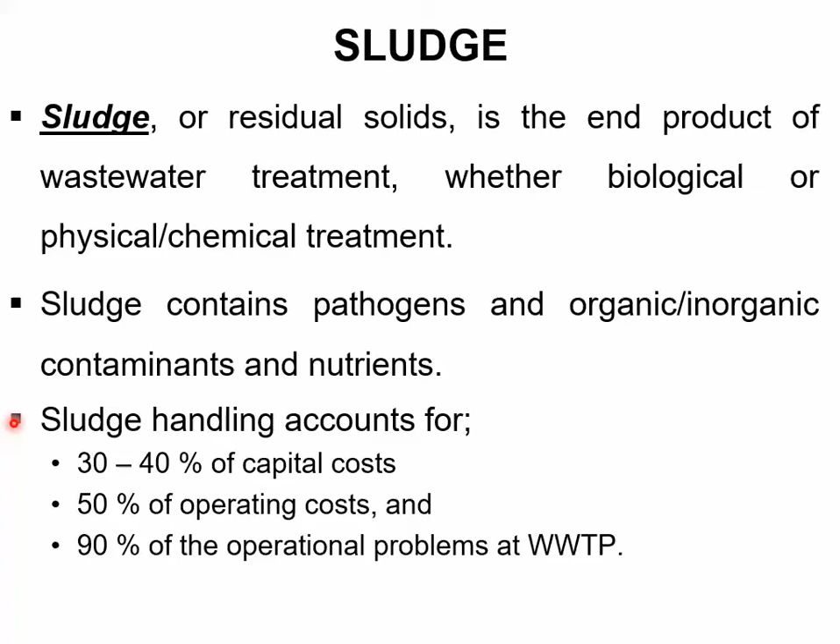Another very interesting fact about sludge handling is that it accounts for at least 30 to 40% of the capital costs of treatment plants, 50% of the operating costs, and around 90% of the operating problems are related to sludge handling and sludge treatment.

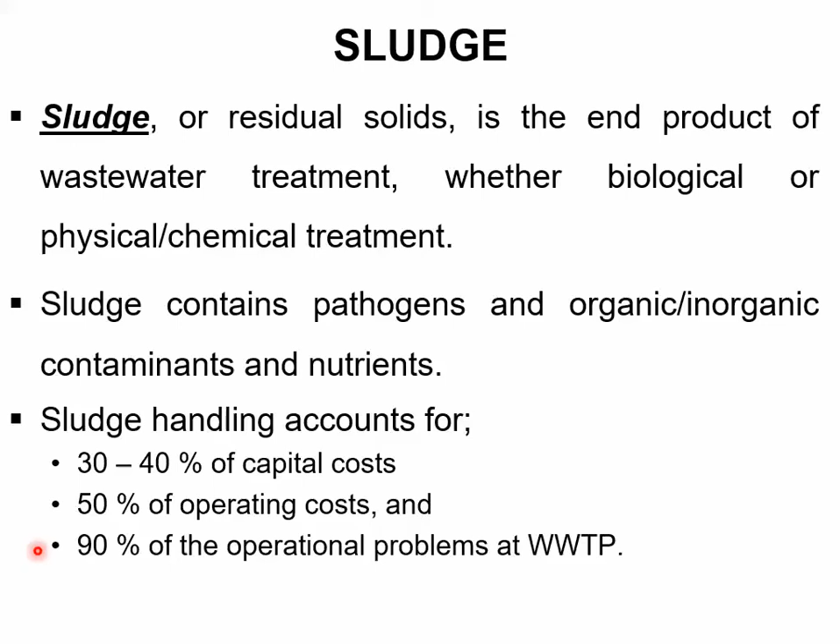So the key objectives of sludge treatment include, firstly, the reduction of the moisture content of the sludge, thereby reducing the sludge volume. So the principal objective is basically reducing the volume of the sludge, achieved by reducing its moisture content. A reduction in moisture content of around 1-2% can lead to significant reduction in sludge volume.

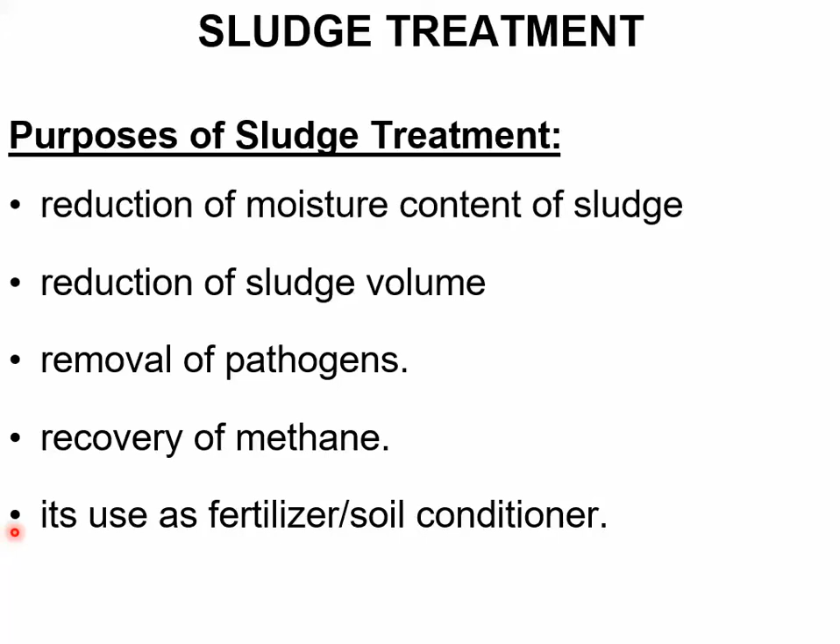Removal of pathogens is another objective. Recovery of methane: in case of anaerobic sludge treatment, methane can be generated and recovered as a renewable energy source. And the final objective is, if we want to use the treated sludge as fertilizer or soil conditioner, we obviously have to treat it first, then it may be used as fertilizer.

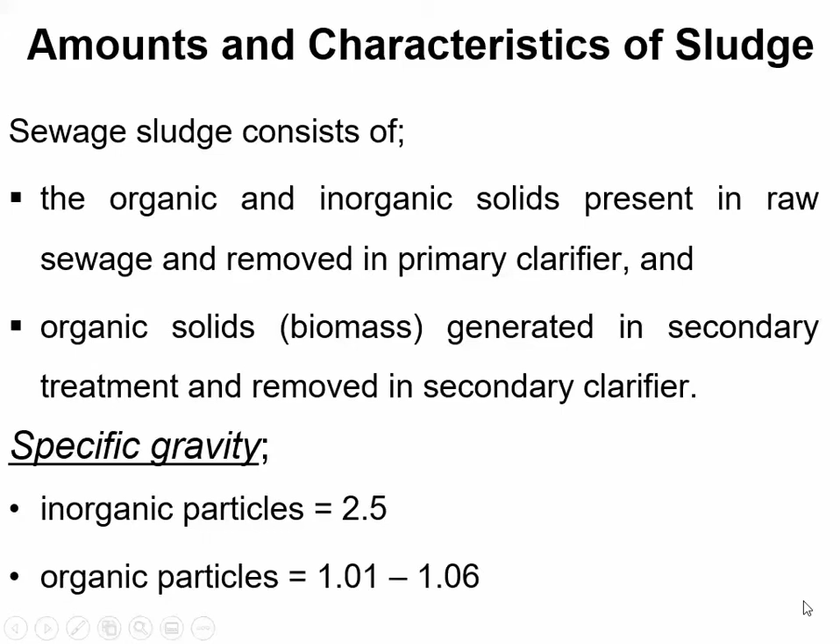Sewage sludge generally consists of the organic and inorganic solids present in raw wastewater and removed in the primary clarifier, plus the organic solids or biomass generated in secondary treatment and removed in the secondary clarifier. The inorganic fraction of the sludge may be assumed to have a specific gravity of about 2.5, while the organic matter has a specific gravity of 1.01 to 1.06, depending upon its source and characteristics.

Domestic wastewater typically contains 100 to 350 milligrams per liter of suspended solids, depending upon the flow. Communities which contain major industries may vary from this value. These typical values are for domestic wastewater only.

Out of this quantity or concentration of solids in raw wastewater, approximately 60% may be expected to be removed in primary clarification. The remaining portion of suspended solids goes to secondary treatment, where it is either oxidized in biological treatment or converted into biological mass.

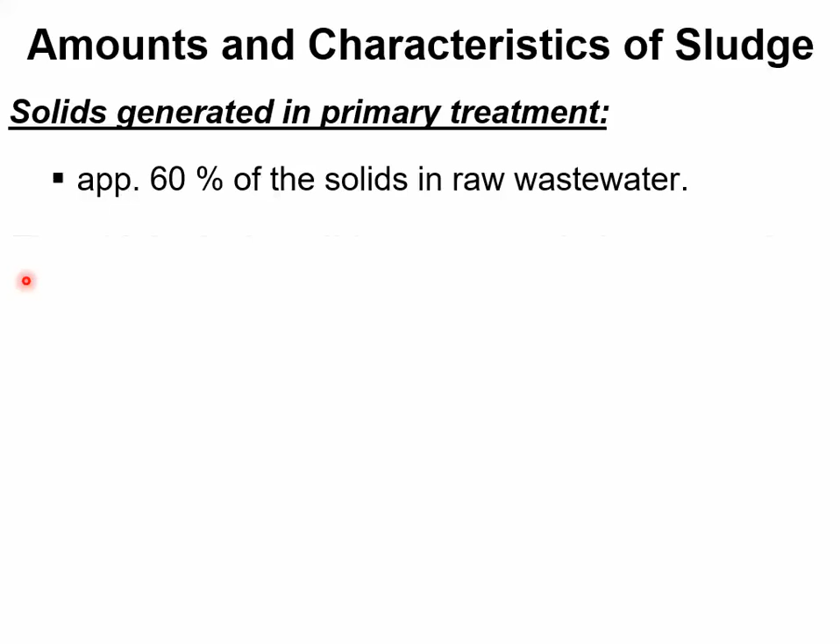The biological solids generated in secondary treatment may be 0.4 to 0.5 kilograms per kilogram of BOD applied in attached growth processes like trickling filter, whereas 0.2 to 1 kilogram per kilogram of BOD applied in suspended growth processes. These are the typical quantities of solids in the form of biomass expected to be generated in secondary treatment. What happens in secondary treatment? The bacteria oxidize the dissolved portion of organic matter and convert it into stable end products, oxidized products like carbon dioxide, and a major portion goes to the biomass itself. So that biomass growth or production is in this range for attached growth processes and in this range for suspended growth processes like aerated lagoons and activated sludge processes.

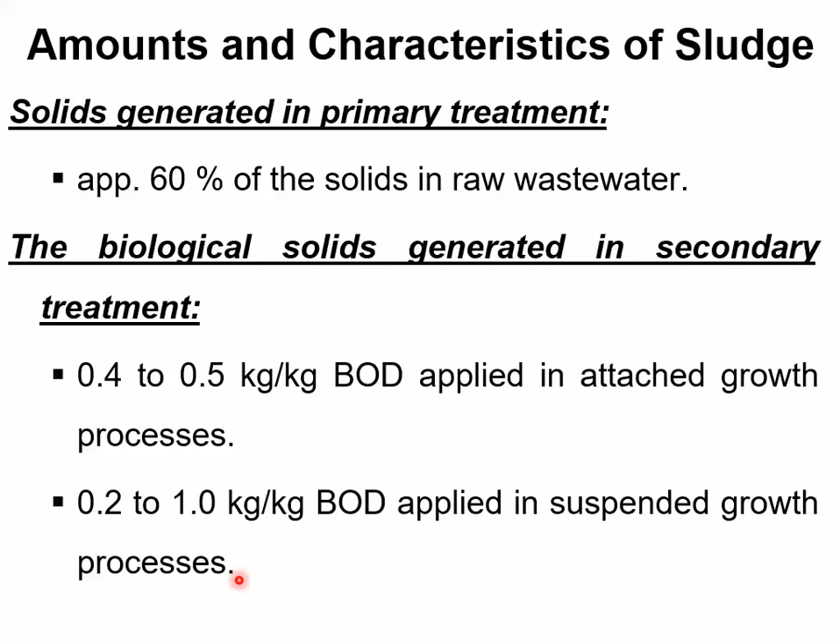So let's solve an example problem to illustrate how to calculate the amount of solids or sludge produced from a primary or secondary clarifier. The problem states that you have to estimate the solids production, meaning dry solids, from a trickling filter plant treating a flow of 1000 cubic meters per day with BOD of 210 milligrams per liter and suspended solids concentration of 260 milligrams per liter.

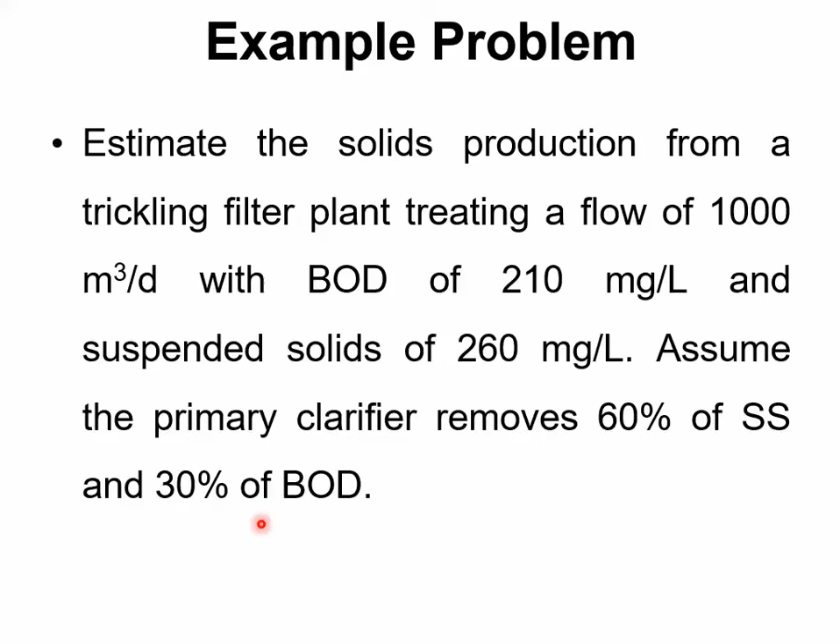Assume the primary clarifier removes 60% of suspended solids—this is a typical removal for a primary clarifier—and it also removes 30% of the BOD, which obviously would be in the form of suspended organic matter. So in this 60% removal of suspended solids, this BOD removal is also included. However, BOD removal is required to estimate what percentage of organic matter went to the secondary clarifier and what was the amount of solids produced in secondary treatment and removed in the secondary clarifier. So let's solve this problem.

For the solution, first we have to estimate what the primary clarifier will produce as solids. As discussed earlier and given in the problem statement, 60% of the suspended solids will be removed in the primary clarifier. So the total amount of solids produced can be estimated by multiplying 0.6 with the suspended solid concentration of wastewater, which is 260 milligrams per liter, and the total discharge or flow, which is 1000 cubic meters per day. This is a typical mass loading calculation, similar to what we've done for BOD: discharge multiplied by concentration multiplied by the fraction removed in the primary clarifier. So the answer is 156 kilograms per day.

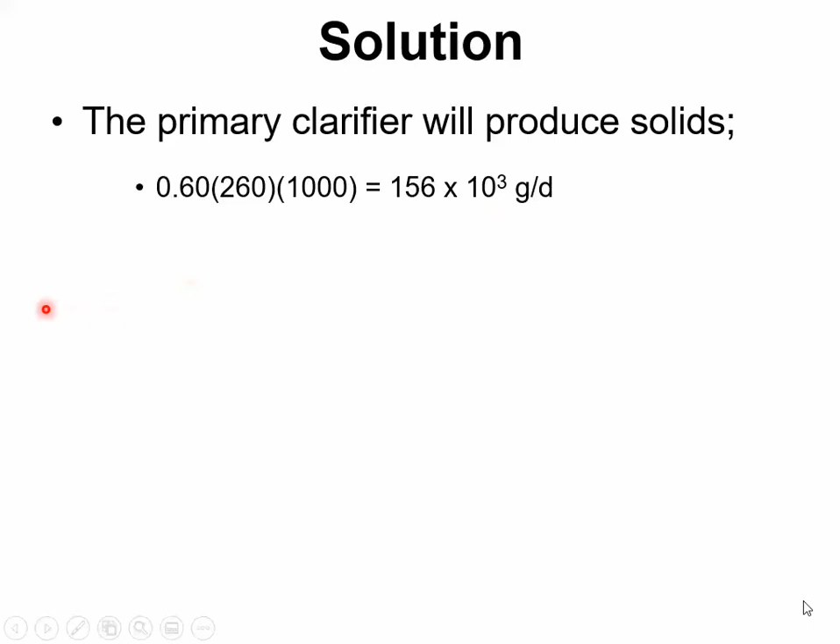Now the secondary clarifier will remove suspended solids in the form of biomass, produced in secondary treatment processes based on suspended and attached growth. The production amount varies but is linked to the BOD load applied to secondary treatment. Approximately 0.5 kilograms of biomass or solids will be produced per kilogram of BOD load into secondary treatment. Therefore, first we need to estimate the BOD load going into the secondary treatment units.

So secondary treatment will receive a BOD load of 0.7, meaning 70% of the original BOD concentration, since 30% is removed in the primary clarifier. So 70% goes to secondary treatment. 0.7 of 210 multiplied by the discharge gives a value of 147 kilograms of BOD per day.

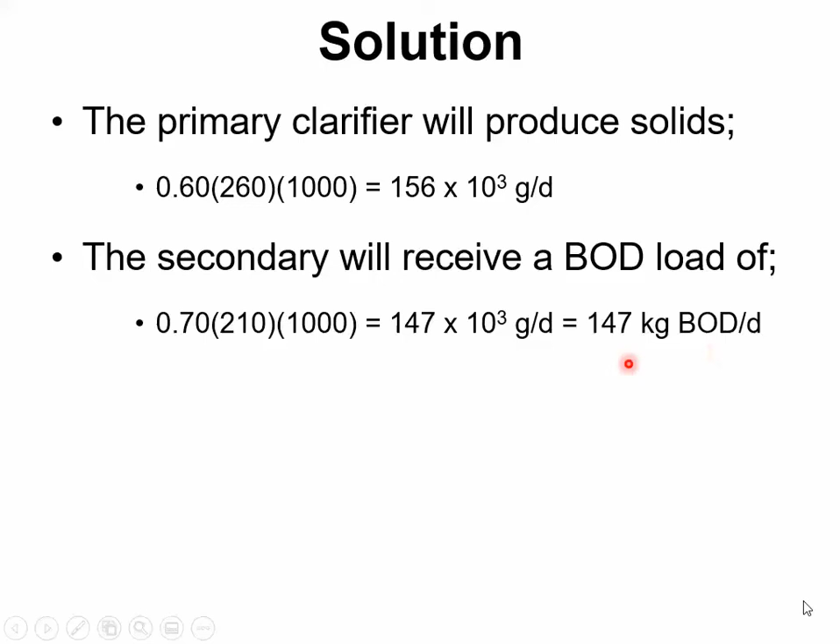Taking a typical value for attached growth processes from the range given earlier, 0.5 kilograms per kilogram of BOD is used here. This gives the amount of solids produced as a result of BOD consumption, and these solids are the biomass. So 0.5 multiplied by 147 gives 74 kilograms of suspended solids produced from the secondary treatment, which will be removed in the secondary clarifier.

So the total mass of dry solids generated from primary and secondary clarifiers will be 156 kilograms from the primary clarifier plus 74 kilograms from the secondary clarifier, giving a total of 230 kilograms per day of dry solids. This dry solid would have a moisture content of, let's say, 95-96% or 98%. Depending on the moisture content, you can estimate the total mass of the sludge as well as the volume of the sludge using the specific gravity.

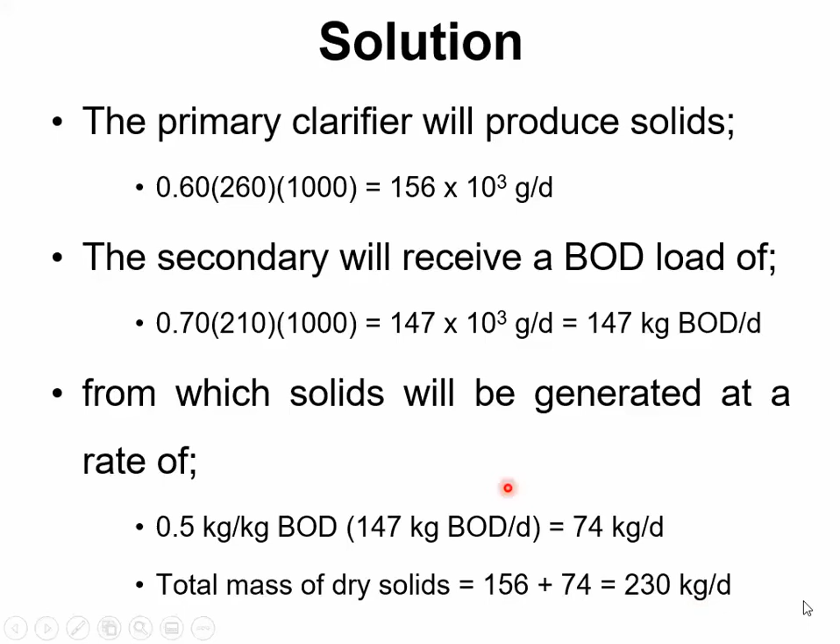Typical solid contents in primary sludge are in the range of 4 to 6%, with moisture content of 94 to 96%. Waste activated sludge contains a lot of moisture, 98.5 to 99.5%, whereas trickling filter sludge is comparable to primary sludge, containing 95 to 96% moisture and 4 to 5% solids. In raw domestic wastewater, around 0.1% are solids and 99.9% is moisture or water.

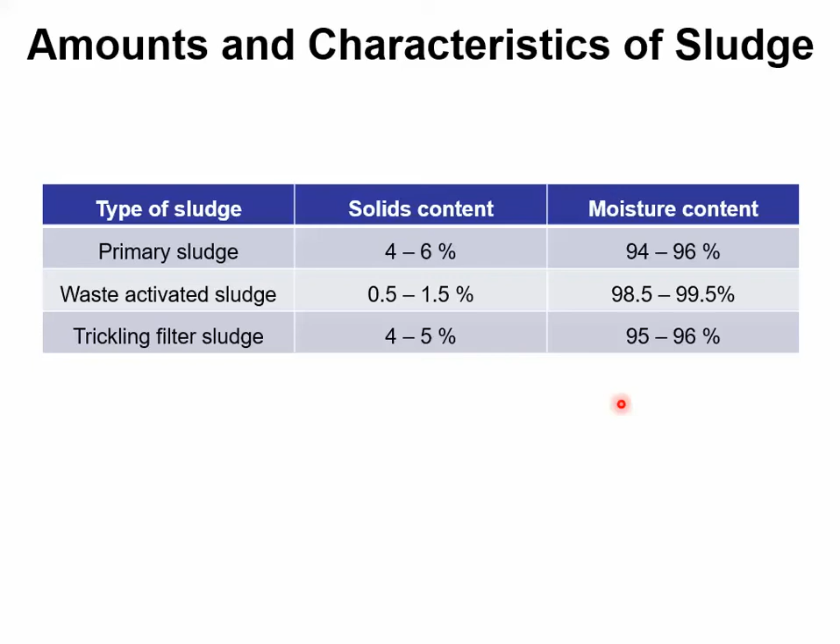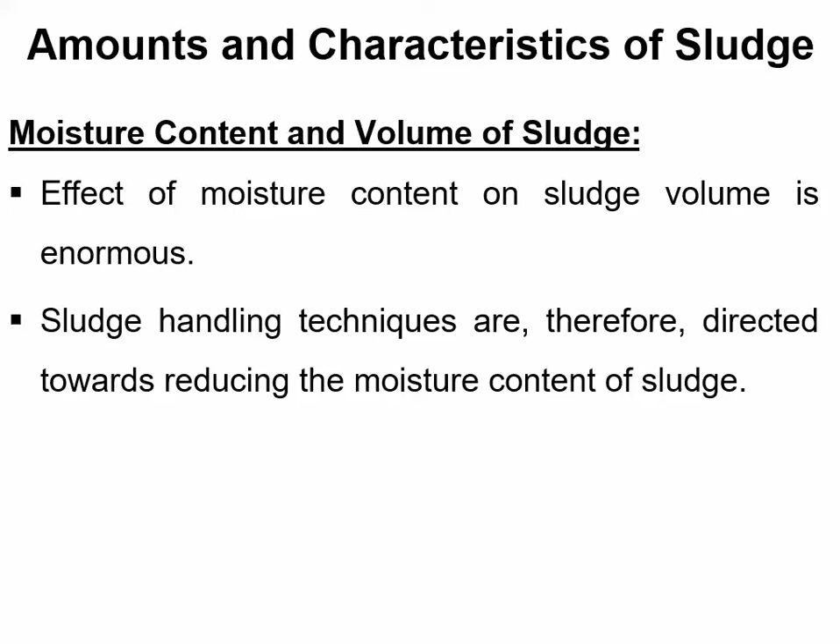In the primary and trickling filter sludge, the moisture content is slightly reduced and solid content enhanced, whereas in waste activated sludge, moisture content remains very high, very close to raw wastewater. Due to this enormous moisture content present in the sludge, the volumes of sludge are very high. Therefore, sludge treatment processes mostly target moisture content reduction. The effect of moisture content on sludge volume is enormous, and sludge handling techniques are directed towards reducing moisture content and thereby reducing the volume of sludge.

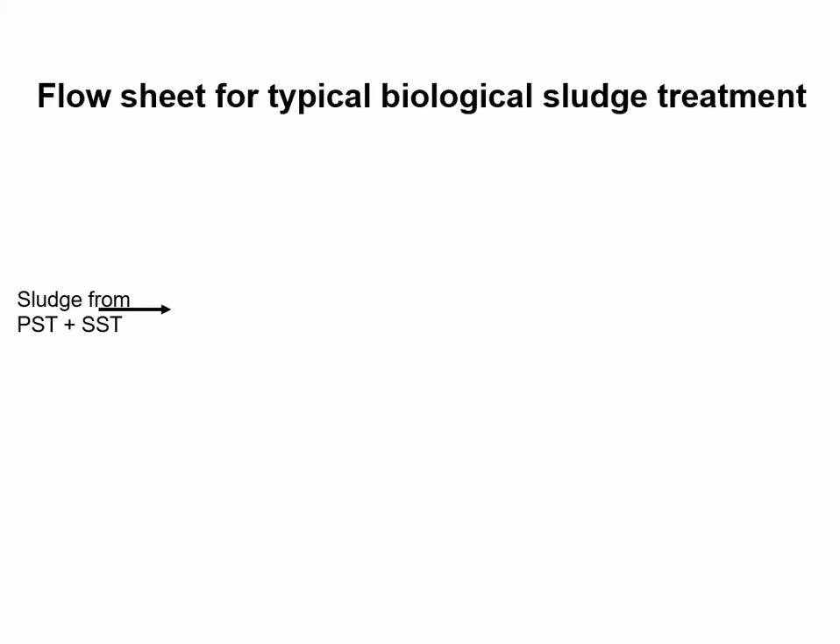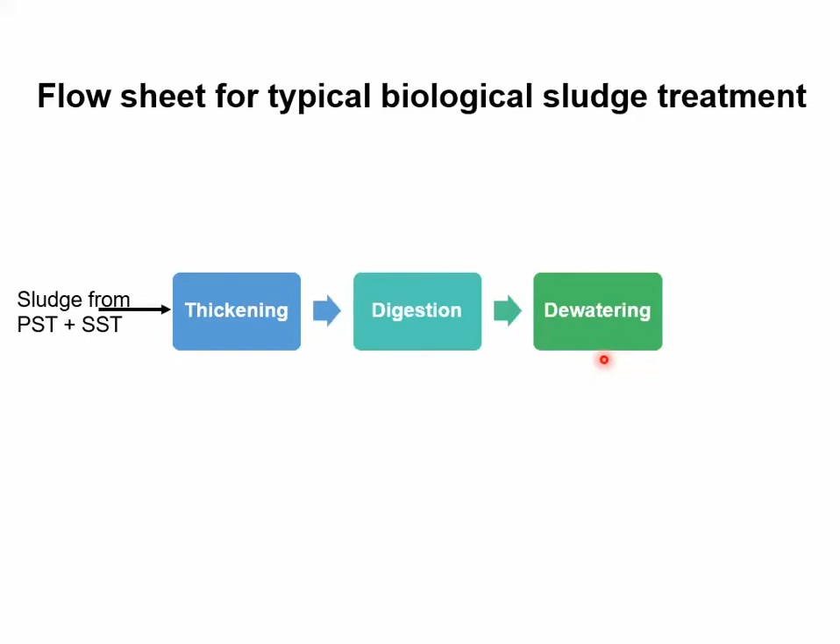As mentioned, most sludge handling techniques are directed towards reducing moisture content and ultimately reducing sludge volume. A typical flow sheet for biological sludge treatment includes the first unit of sludge thickening, which aims to reduce moisture content by gravity settling. Then comes sludge digestion, which can be aerobic or anaerobic, similar to digestion of organic matter in secondary treatment, except here the organic matter is sludge. The third unit is dewatering, again to reduce moisture content. After dewatering, dry solids are left, which are disposed of. The supernatant from the digestion unit and the underflow from the dewatering unit—the water separated from the sludge in both units—goes to the primary sedimentation tank, redirected back to the start of the wastewater treatment plant.

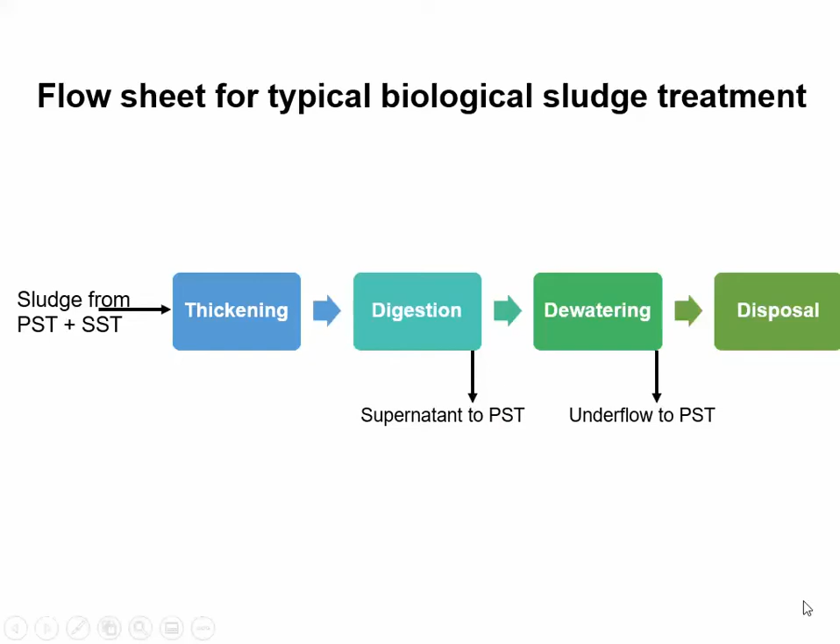Here is another example problem to illustrate how percentage moisture content affects sludge volume. The wastewater treatment plant produces 1000 kg of dry solids per day at a moisture content of 95%. The solids are 70% volatile, meaning organic, with specific gravity of 1.05, and 30% are non-volatile, meaning inorganic, with specific gravity of 2.5.

We have to determine the sludge volume as produced and after an anaerobic digestion process, which reduces two things. First, it reduces the volatile solids by digestion and oxidation by 50% of the original amount, and it produces a sludge with moisture content reduced from 95% to 90%. So you have to estimate the sludge volume as produced and after the digestion process.

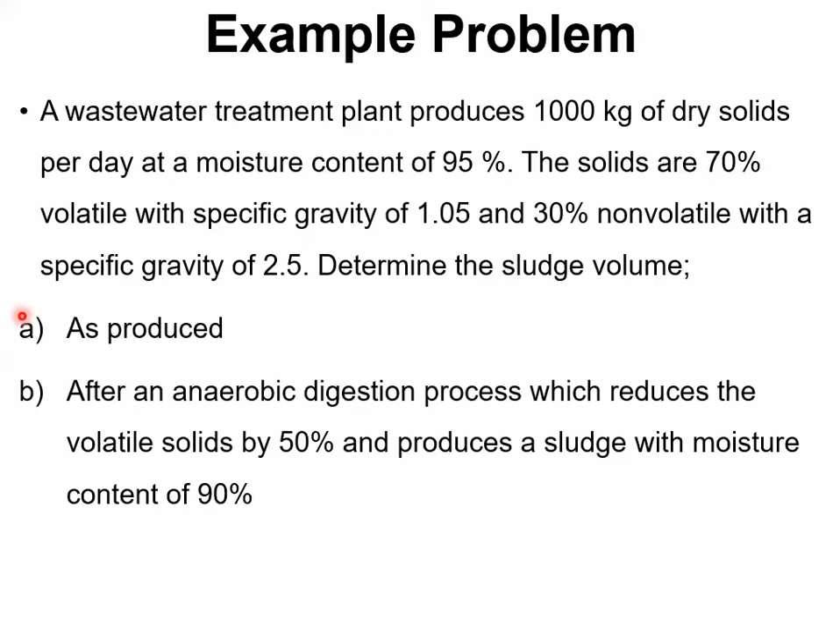So let's first deal with part A. We should determine the volume of the sludge as produced. The original mass of the sludge would be mass of dry solids divided by fraction of solids. Since the moisture content is 95%, the fraction of solids would be 0.05. Dividing, we get 20,000 kilograms per day. This is the mass of sludge.

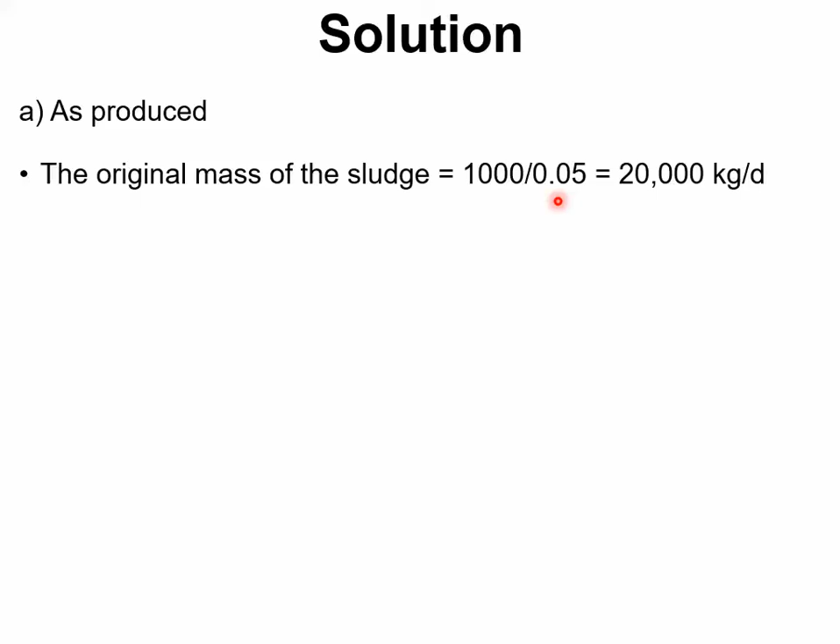Originally, mass of dry solids was provided as 1000 kilograms. We divided it with fraction of solids, so we get the mass of total sludge, which is 20,000 kilograms per day. As stated, 1000 kilogram is dry solid weight, of which 70% is volatile and 30% is non-volatile. Hence the sludge contains volatile solids, non-volatile solids, and water as moisture. So let's determine the volume of volatile solids, then non-volatile solids, then water, and later sum these up to calculate total volume of sludge.

For volatile solids, the mass is 70% of the total 1000 dry solids, so it is 700 kilograms. To get the volume, we divide it with the specific gravity: 700 divided by 1.05 gives 667 liters. Non-volatile solids are 300 kilograms, being 30% of the 1000. So 300 kilogram divided by their respective specific gravity of 2.5 gives a volume of 120 liters.

Now what is the water? If 20,000 is the total mass of sludge and 1000 is the dry solids, the mass of water would be 19,000 kilograms. And volume of water would be the same, taking specific gravity as 1. So the total volume of the sludge would be 19,787 liters.

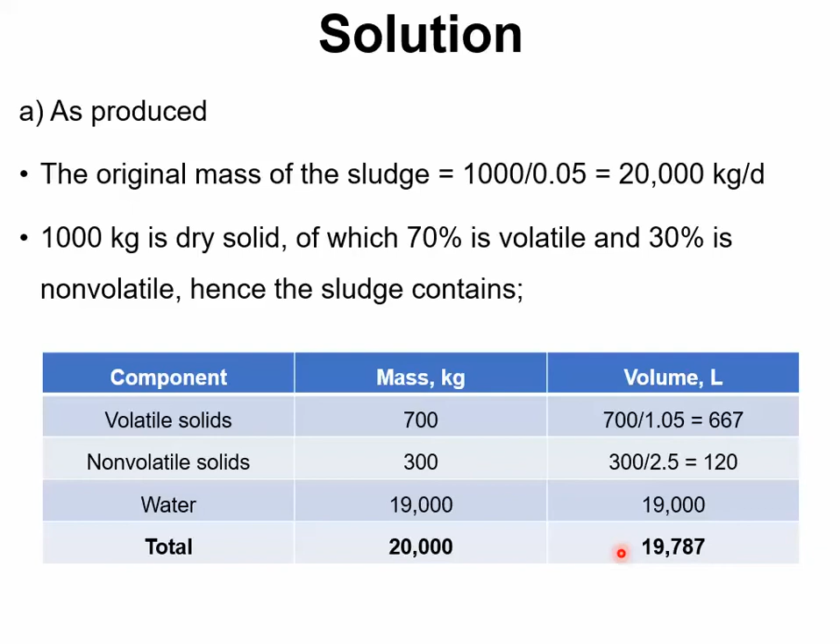Now after digestion, which is part 2 of the problem, it was stated that volatile solids are reduced to 50% of the original. So originally they were 700 kilograms, and after 50% reduction they are left as 350 kilograms. Moisture content has been reduced to 90%. Therefore, the dry mass will be reduced to 650 kilograms because non-volatile solids, which were 300, remain the same, whereas volatile solids, which were 700, have now been reduced to 350. So 350 plus 300, the total dry mass would be 650 kilograms.

And the sludge mass, using this moisture content and the solids fraction of 0.1, dry mass of solids divided by fraction of solids gives us the total mass of the sludge as 6500 kilograms. So now you can estimate how much reduction in mass has been achieved as a result of the digestion process. Originally it was 20,000 kilograms, now it is 6500 kilograms.

The digested sludge would contain these elements: volatile solids, originally 700, after digestion reduced to 350, so its volume would be 333 liters. Non-volatile solids are unchanged because they are not affected by digestion. And the water, now subtracting 650 kg from 6500 gives the value of 5850 kilograms, and the volume would be the same.

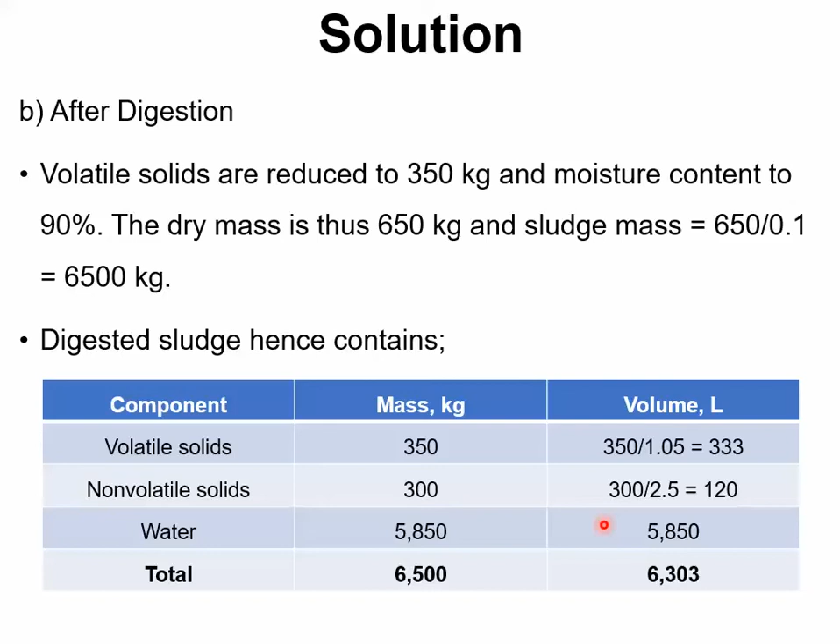The first unit applied for sludge treatment is sludge thickening. The purpose of sludge thickening is to reduce the moisture content and to increase the percentage of solids in the sludge.

The thickening of the sludge is most commonly achieved by gravity thickeners. Other methods used are flotation and centrifugation, but gravity thickeners are most commonly used. They are just like sedimentation tanks. As you have studied the primary and secondary sedimentation tanks, this is also a sedimentation tank in which sludge is applied, and it settles down by the mechanism of type 4 settling, which was referred to as compression settling. If you recall, we discussed that in the water treatment topic of sedimentation. Sludge thickening involves type 4 or compression settling in just a sedimentation tank.

The thickened sludge is removed from the bottom, and the supernatant, which is separated from the sludge water, is removed from the top and returned back to the primary sedimentation tank for further treatment.

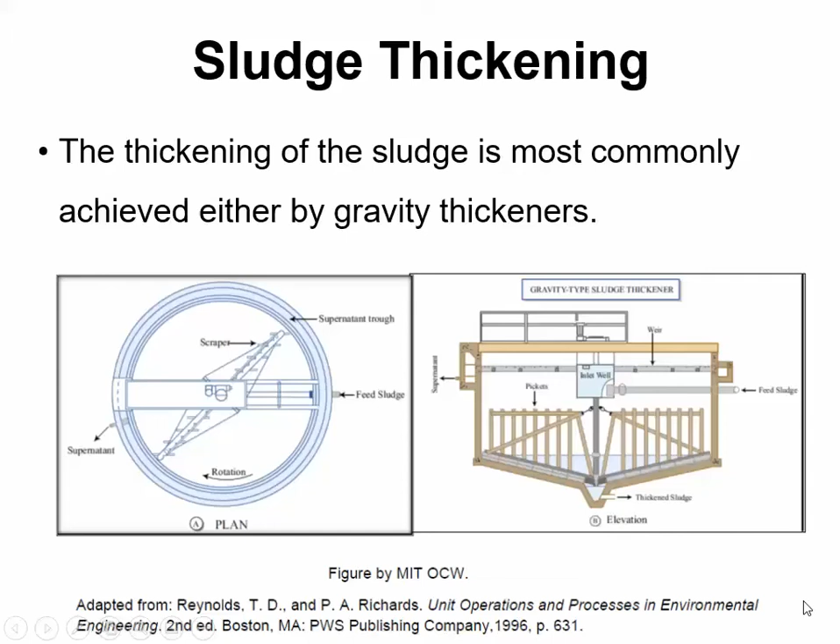The second treatment unit employed for sludge treatment is sludge digestion. This is the process of treating the organic solids to make them stable, to oxidize them basically, so that they are not subject to further degradation or putrescible anymore.

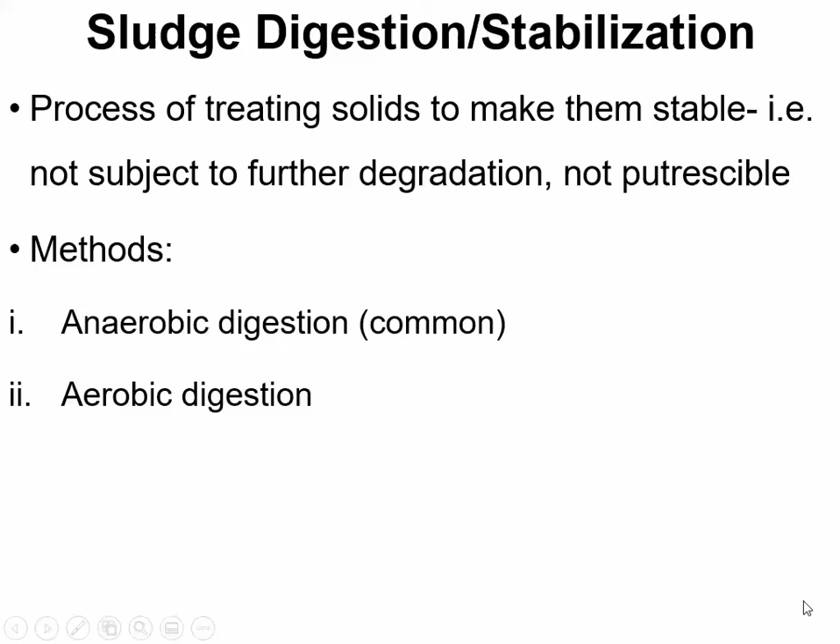The methods employed for sludge digestion include anaerobic digestion and aerobic digestion, both of which are biological processes. Other methods include alkaline stabilization, composting, or incineration. Out of these, anaerobic digestion is commonly used because of advantages such as no requirement of oxygen compared to the aerobic process, and the production of methane as a byproduct of digestion.

Then acid-forming bacteria, also known as acid producers, convert these soluble organic products into organic acids such as acetic acid and propionic acid. These organic acids are further converted by methane-forming bacteria, also known as methanogens, into methane and carbon dioxide, along with new bacterial cells and stabilized organics.

This overall process, particularly the methane-forming bacteria which convert organic acids into methane, works best in the pH range of 6 to 8. To adjust the pH, lime is added if required.

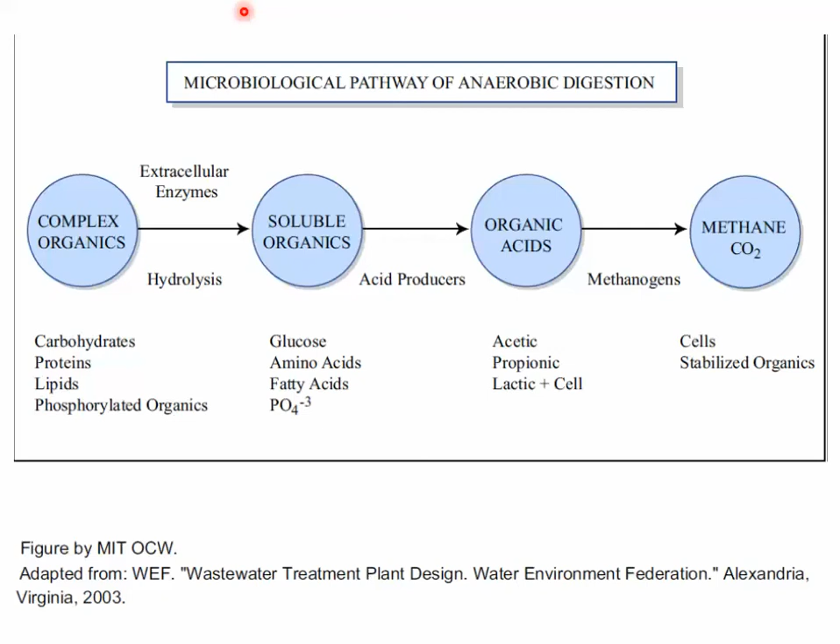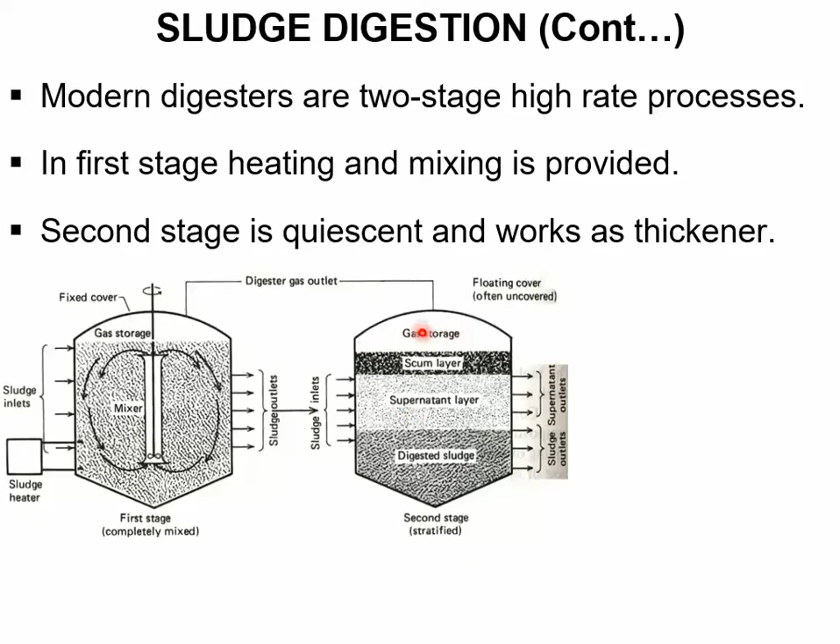Modern digesters are two-stage, high-rate processes. In the first stage, heating and mixing is provided, whereas the second stage is quiescent and works as a thickener or settling unit, in which different layers are formed. At the bottom is the digested sludge, then the supernatant layer, then the scum layer, and finally gas storage above it. Similarly, in the first stage, since the reaction starts, gas can be produced, so gas storage is provided at the top of the sludge.

Why is the sludge heated in the first unit? Because temperature has a significant effect on the anaerobic digestion reaction, and it can significantly reduce the required retention time and hence the volume of the digester. For example, at 20 degrees Celsius, 10 days of retention time are required, whereas at 35 degrees Celsius, only 2 days would be required. This shows the significance of temperature.

Therefore, in modern anaerobic digesters, the contents are both heated and mixed, with temperature normally maintained close to 35 degrees Celsius, and mixing sufficient to completely intermix the contents once daily.

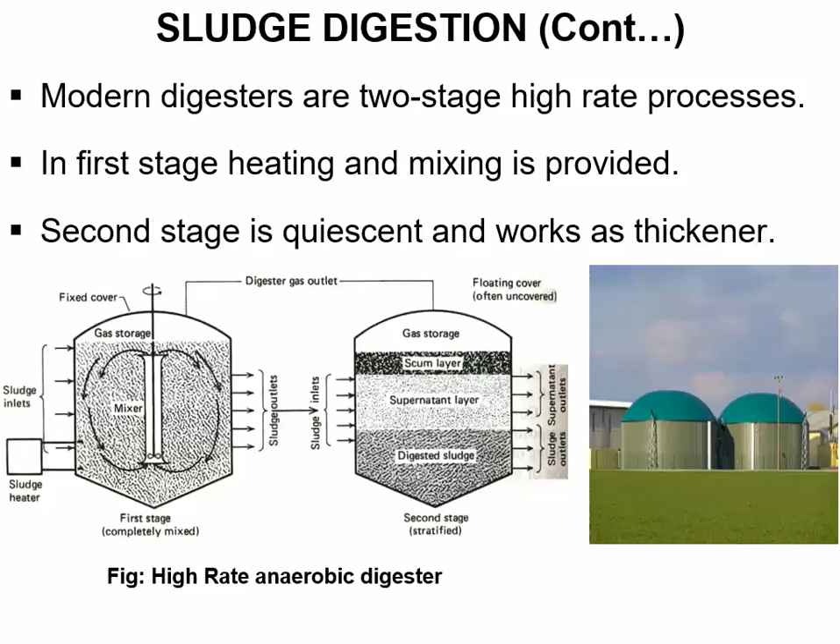The gases produced in anaerobic digestion consist of 60 to 70% methane by volume, with the remainder being carbon dioxide and traces of ammonia, nitrogen, hydrogen sulfide, etc. Because of these contaminants, particularly carbon dioxide and hydrogen sulfide, this mixture of gases is not a very good fuel, since carbon dioxide is not combustible and hydrogen sulfide produces sulfuric acid when burned. Therefore, these two gases have to be stripped off and separated from the methane before it can be used as fuel gas.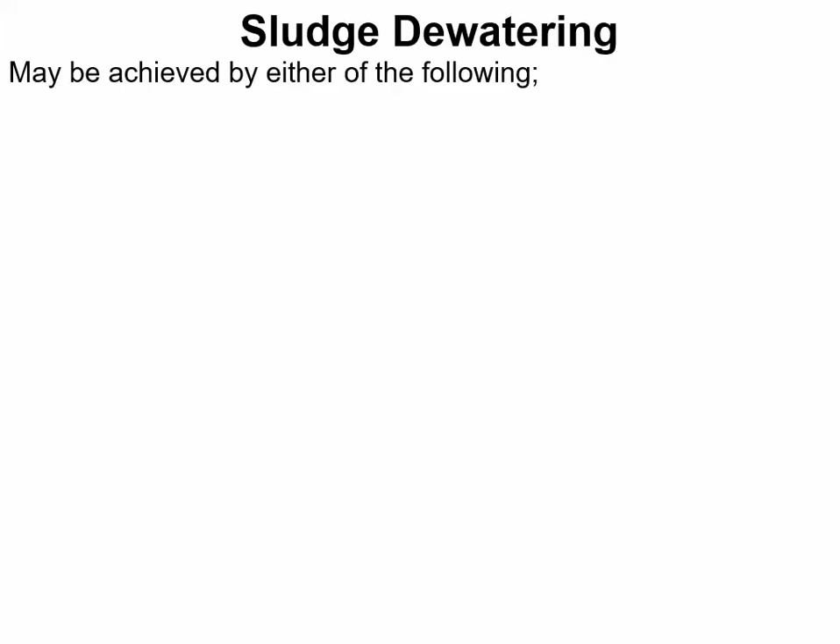The next treatment unit is sludge dewatering. Dewatering processes may be usefully divided into air drying and mechanical methods. Air drying includes methods in which moisture is removed by evaporation and gravity or induced drainage, such as in sand beds or sludge drying beds. Whereas in mechanical methods, such as belt filters, mechanical techniques are used to separate water from the solids.

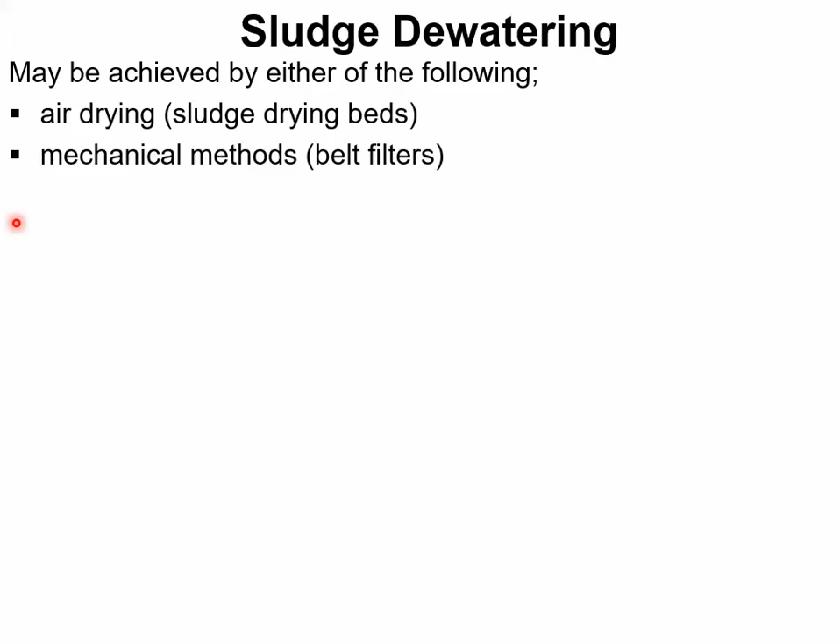Let's first talk about sludge drying beds or sand beds. Sand beds are the oldest sludge dewatering technique and consist of around 100 to 300 millimeters of coarse sand, underlain by layers of graded gravel ranging from 3 to 6 millimeters at the top to 40 millimeters at the bottom. The overall thickness of this gravel layer is around 300 millimeters.

The bottom of the sludge drying beds is usually natural earth, graded to 100 or 150 millimeter drain tiles placed on 6 to 9 meter centers. Side walls and partitions between bed sections are made of concrete or wooden planks and extend 300 to 400 millimeters above the sand surface.

Beds are operated by filling them with digested sludge to a depth of around 200 to 300 millimeters. Dewatering occurs as a result of drainage. The water percolates down, and evaporation is very much affected by the climate.

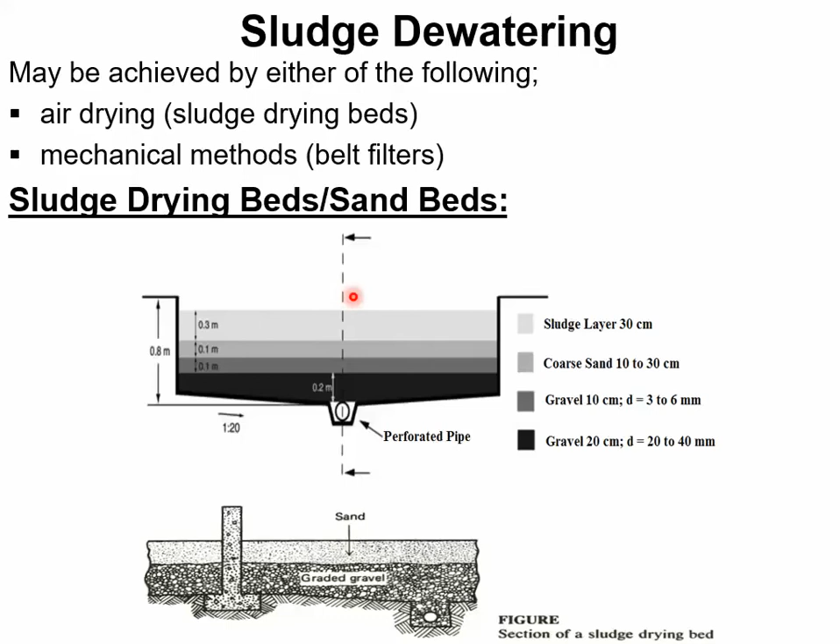In dry climate, sludge will be dewatered easily, whereas in wet climates there would be some problem for dewatering. Therefore, covering the beds with glass or some other plastic sheets, for example, has proven to be helpful in wet climates.

The beds are 6 to 10 meters wide and up to 40 meters long, and at least two beds are provided in even the smallest plants, whereas in large to medium plants a multiple number of beds are required.

Typical loading rates for digested sludges range from 60 to 200 kilograms of solids per square meter of the sludge drying bed area per year, for the digested sludge, not for the raw sludge. After digestion, this could be the loading rate to be applied for sludge drying beds.

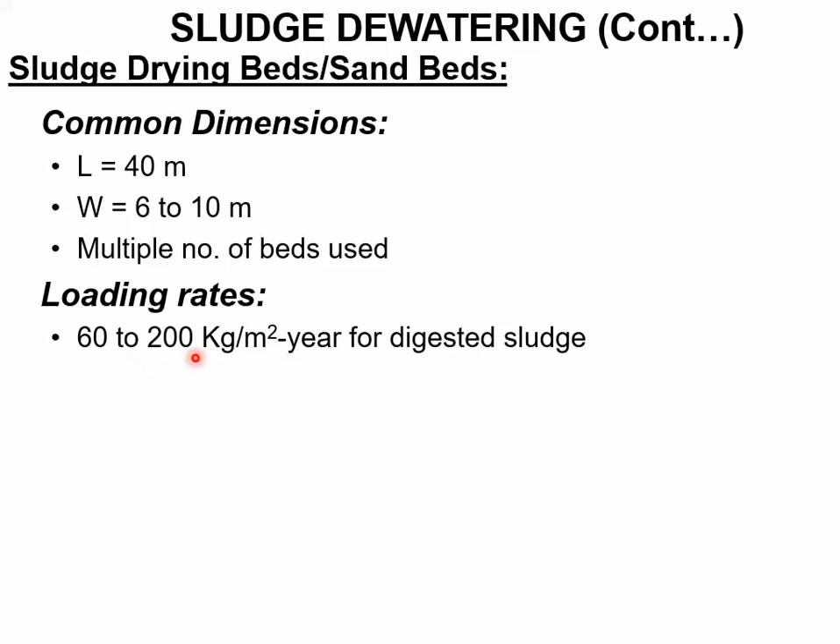Drying takes from a few days to a few months depending upon the climate and the season, and after dewatering, the sludge solids content will range from 25 to 35% and volume will have been reduced by 80 to 85%.

The dried sludge can be removed from the bed with light mechanical equipment such as front-end loaders. A small amount of sand is lost in each drying cycle, and the bed must be refilled periodically.

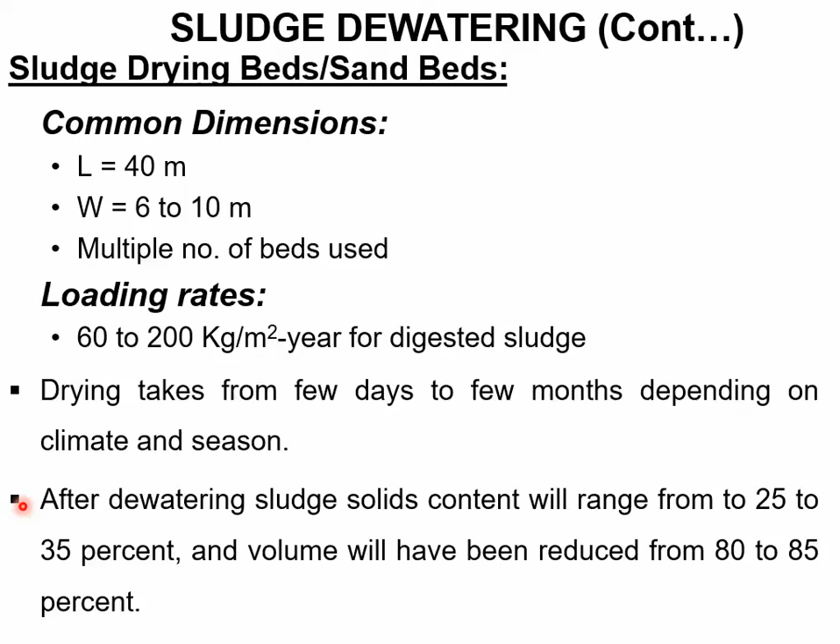Sludge drying beds are one of the cheapest methods for dewatering of the sludge. However, they require a very large land area because the dewatering and drying process occurs naturally, by air drying, drainage and evaporation. The area required for sludge drying beds can be estimated by the loading rates given on the previous slide.

So for such applications where land area availability is not up to the requirement of sludge drying beds, where land space is limited, for example in industries, mechanical dewatering processes are used there.

Mechanical dewatering processes include belt filters, pressure filters, vacuum filters, centrifuges, and a number of other similar devices. Out of all these, belt filters have become the most popular sludge dewatering device in new installations because their capital cost and operating costs are generally less than other mechanical techniques, and they also produce a sludge which can be handled as a solid.

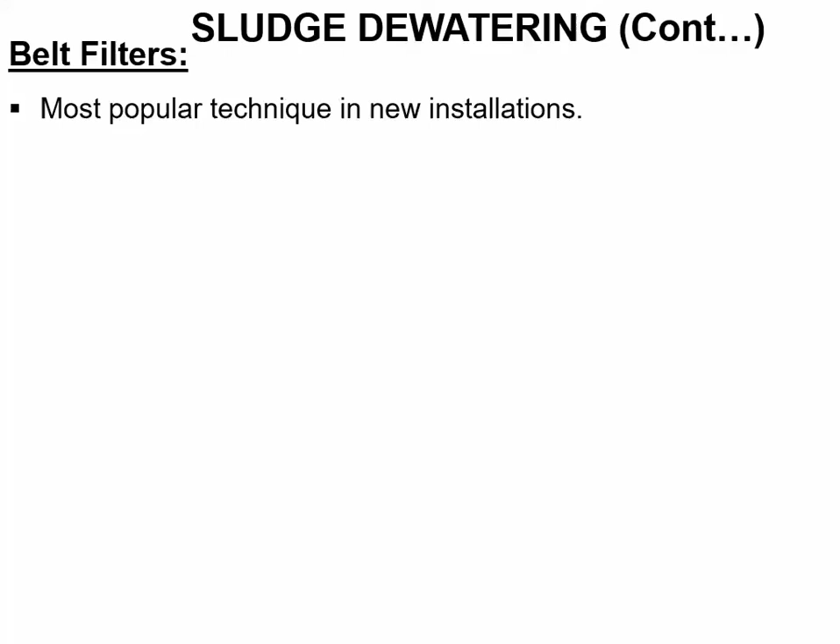These machines are made in a variety of configurations consisting of one or more endless woven belts which pass over and around a number of cylinders.

In most designs, the chemically conditioned sludge is fed to an open belt surface on which gravity drainage occurs. As the belt moves forward, the gravity drainage would occur.

At the end of the gravity drainage section, provided the sludge has been properly conditioned, the solids content here should be 10% or more. At this moisture content of 90% or lesser, it behaves as a solid and can be subjected to pressure, shear and vacuum in the subsequent subsections of this belt filter.

A second belt is then gradually brought down towards the moving sludge at the end of this gravity zone and gradually applies pressure to the solids, squeezing out additional moisture. As the paired belts move around these rollers, their speed relative to each other varies and the sludge mass is sheared, aiding in release of the free water.

The pressure gradually increases through the machine, and in some designs a partial vacuum is also applied. The belts then separate at the end, and the sludge cake is dislodged by scraping the belt or by passing it around a very small radius roller.

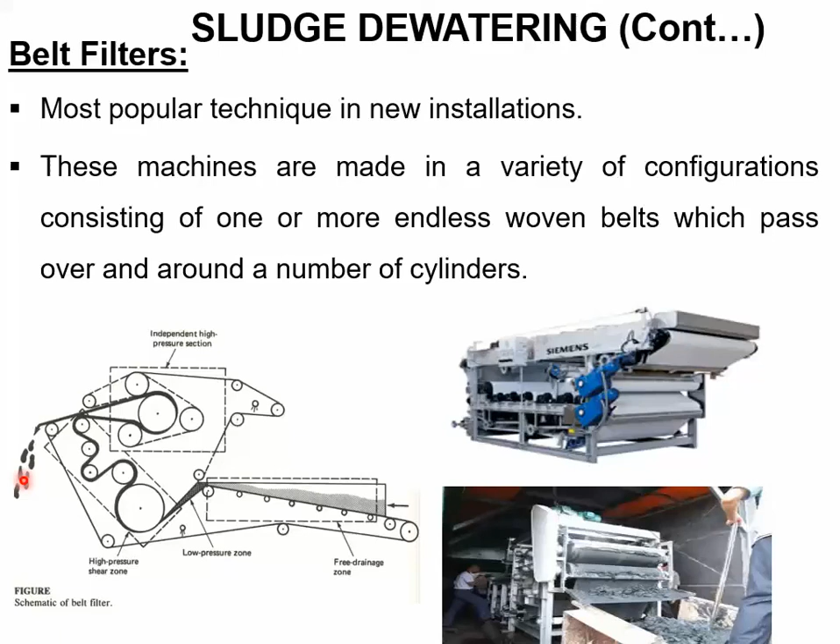So this product can be expected to have solids content in the range of 12 to around 40%, whereas 20% is the typical value of the solids content in this sludge obtained.

As I mentioned on the previous slide, chemically conditioned sludge is applied on the belt filters. So why is chemical conditioning required? Because it is not easy to separate water from the solids. In natural processes such as sludge drying beds, since long retention times are provided, conditioning is not required — digested sludge can be applied directly to sludge drying beds. Whereas for mechanical dewatering processes such as belt filters, sludge has to be first chemically conditioned so that dewatering can be enhanced.

Chemical additives which are commonly used for this purpose to enhance sludge dewaterability include ferric chloride, lime, and organic polymers. The product from the belt filter, as I have already mentioned, can be expected to have solids content ranging from 12 to 40%, with 20% being the typical value.

Loading rates for the belt filters are in the units of kilograms per hour per meter of belt width. These loading rates and the performance of the belt filters vary depending upon the type of sludge and the pre-treatment applied with the help of these chemicals.

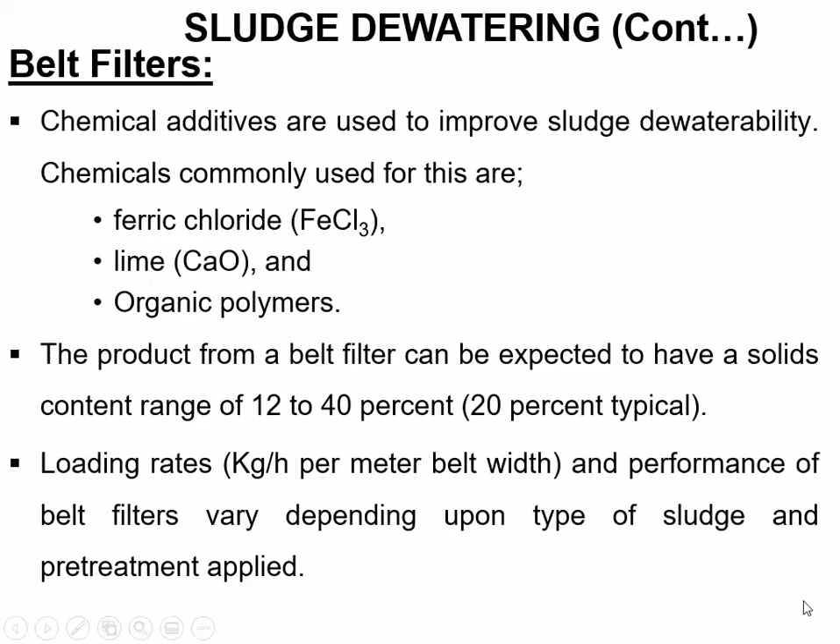Next we are going to discuss a very brief topic of on-site sanitation. On-site sanitation means the sewerage facility required at construction sites where proper sewerage system is not available, and at such communities where installing a proper sewerage system is not economical. Therefore, for each house, a separate sanitation system can be used to dispose of its wastewater.

Typical on-site sanitation is employed using first a septic tank, and then effluent from the septic tank is disposed of through a soak away, soakage pit, or a drain field. Let's discuss about these two units individually.

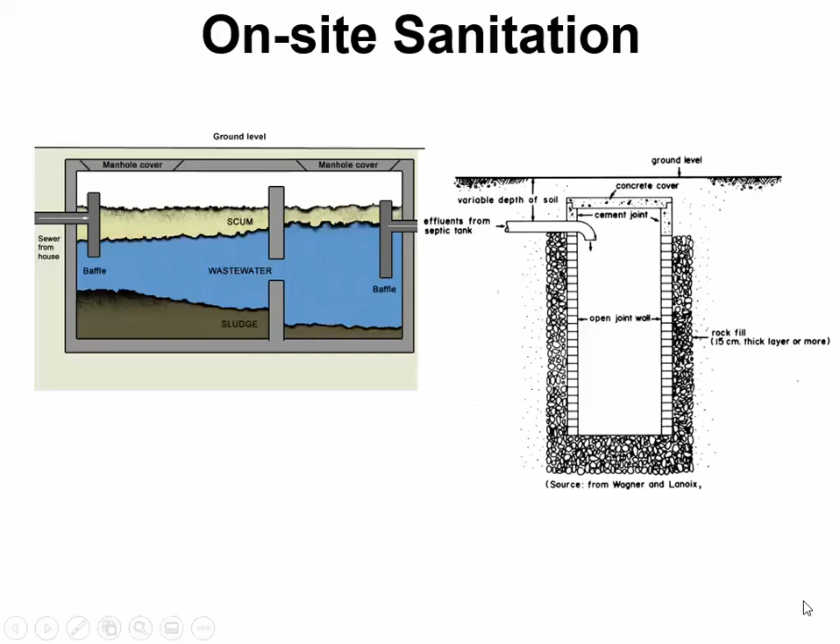First, about the septic tank. This is an underground structure, the purpose of which is collection, storage, and to some extent the treatment of sewage. So it also does partial treatment of sewage.

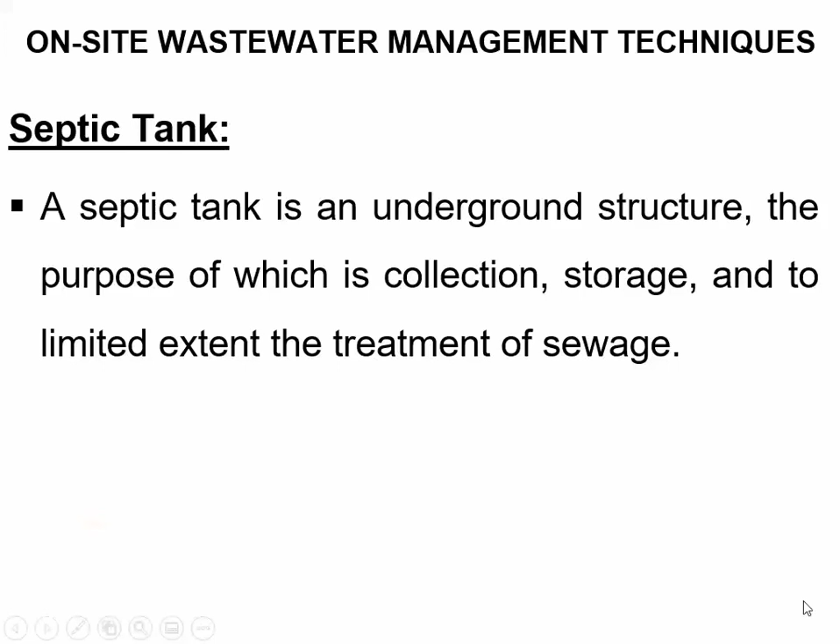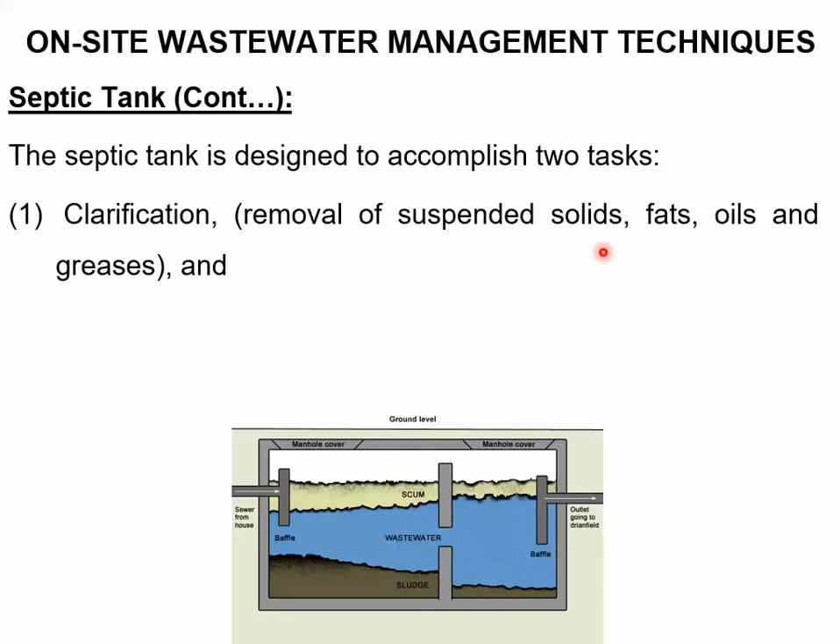The septic tank is designed to accomplish two tasks. First, the clarification, that is the removal of suspended solids primarily, and then other things such as fats, oils and greases. And the treatment, which is partial decomposition or partial oxidation of the settled organic matter by anaerobic digestion.

Wastewater from a house comes to a 2-compartment or 3-compartment septic tank. The suspended solids, which are organic suspended solids of domestic wastewater, settle down at the bottom of the first compartment, and the rest of the suspended solids can also settle at the bottom of the second compartment. These settled suspended solids then undergo anaerobic decomposition by bacteria.

Organic matter is oxidized into end products of typical anaerobic decomposition such as H2S gas, methane gas, carbon dioxide, etc. The lighter particles such as oil and grease particles accumulate at the top surface of the septic tank, and clearer water goes to the second compartment and from there to the outlet to the drain field or soakage pit.

So we are discussing the septic tank as a method of wastewater disposal. Prior to disposal through a soakage pit, the wastewater is settled, clarified and partially treated so that relatively clear water is disposed of into the soil using the soak away.

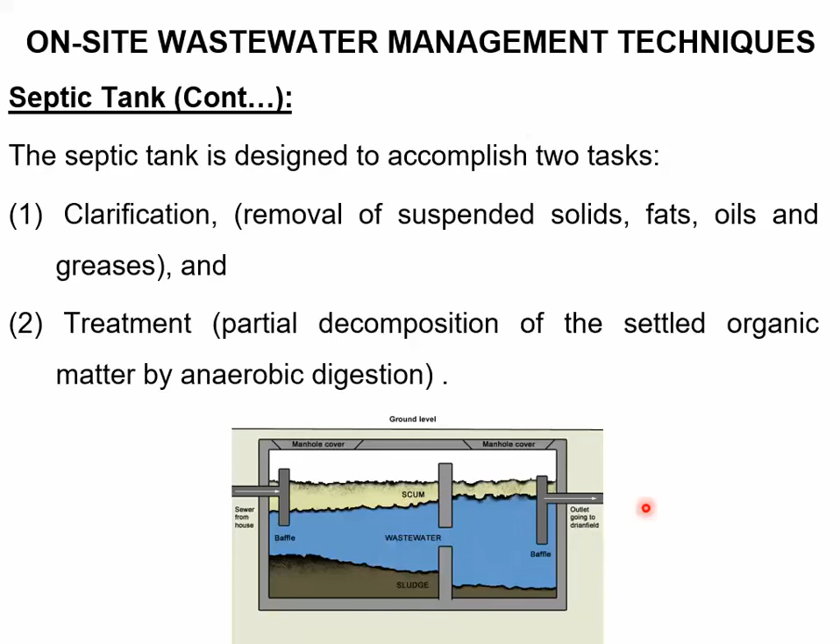The partially treated effluent of a septic tank is then further disposed of into the soil with the help of a soak away, a drain field, or as it is also called a soakage pit. Soakaway is an underground soil treatment system which receives partially treated sewage from a septic tank and disposes it into the soil. This effluent coming from the septic tank is disposed of into this soakage pit.

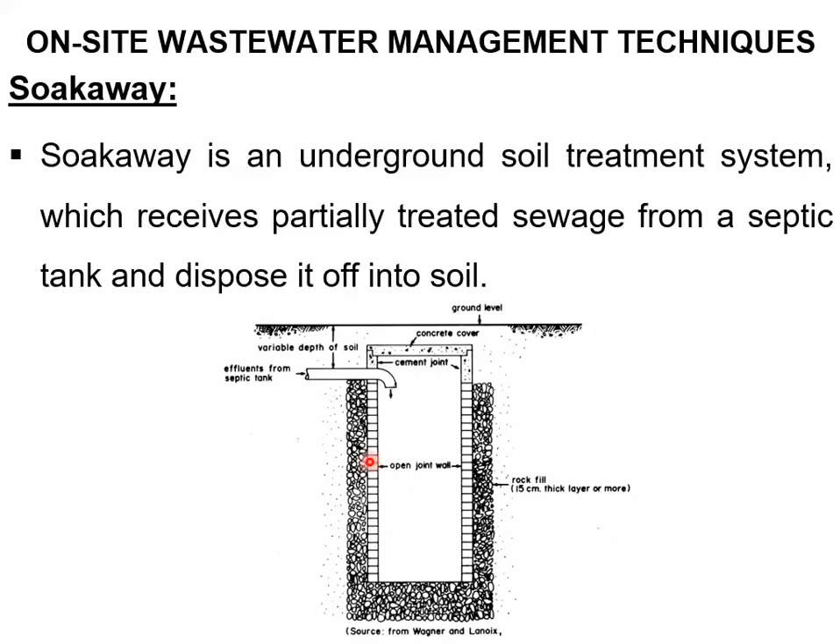This pit is just like a brick manhole, you can say. The walls are brick and it is rock filled, around 15 centimeter thick layer, or more thickness can also be provided. This is the rock filling around and under this soakage pit.

So wastewater which is partially treated would percolate into the soil through its bottom and through its sides, and will get treatment through the soil filter. The soil, since it's a natural filter, can remove conventional pollutants, almost all of them, and to some extent heavy metals and other pollutants as well.

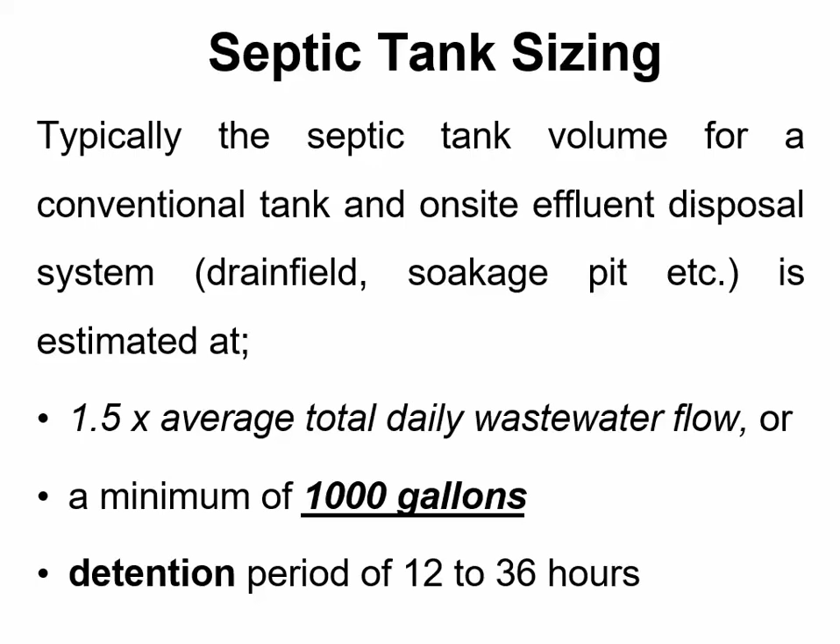Another important thing regarding septic tanks is that since odorous gas is expected as a result of anaerobic digestion, the outlet pipe for the gas should be provided above human height. The maintenance of the septic tank and the soakage pit is also a very important factor. Desludging of the septic tank is conventionally required after 2 to 3 years.

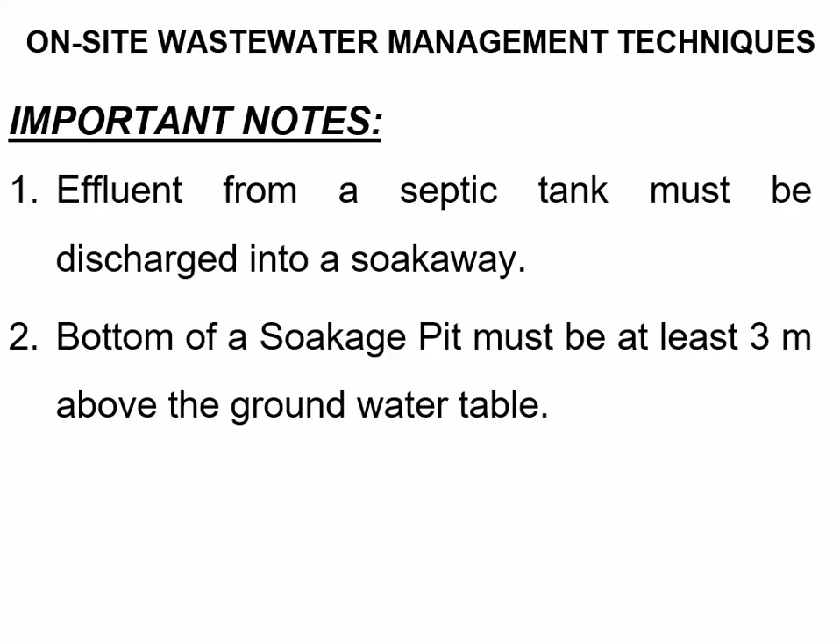However, during this time of 2 to 3 years, both the septic tank and the soakage pit must be inspected carefully for any problems or issues.